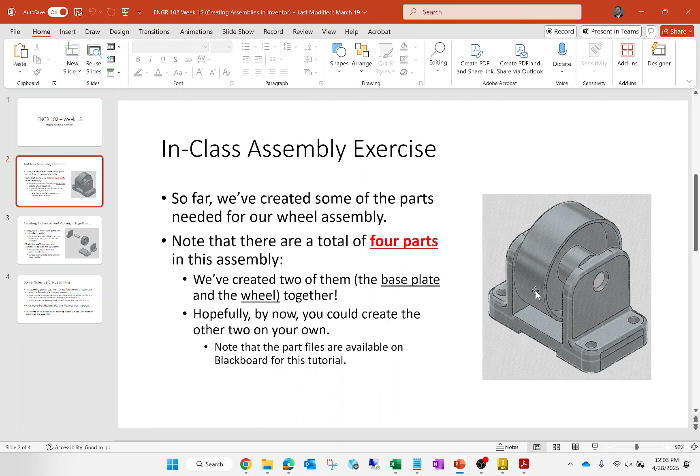All right, so what we're going to do today is, we've created 2 of these parts together, I imagine you could create the other 2 on your own. What we're going to do is assemble them. So the way that works in Inventor is we create what's called an assembly file, and then we create several instances of those assemblies, and then we stitch them together. So we're going to have 4 parts, but we will have 5 instances, because 2 of those parts, the angle bracket, we're going to use 2 instances of.

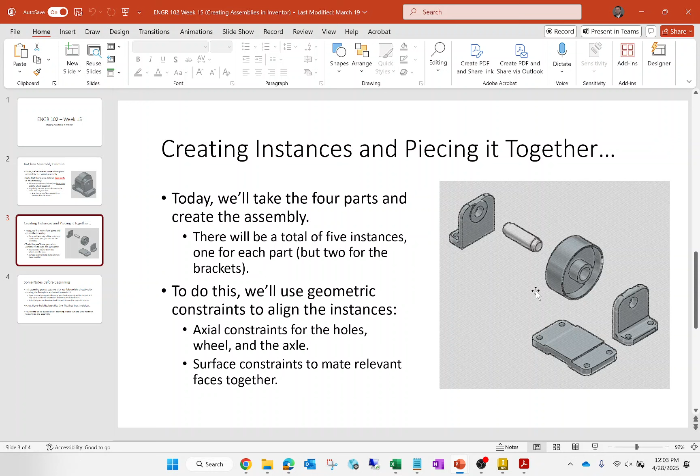Okay, so let me go ahead and open Inventor. I've got Inventor open here. I'm going to create a new assembly, we're not creating a new part, we're creating a new assembly. So that's down here. We're going to create a standard metric assembly, hit create, and then let this do its thing.

So if you look up here, it is slightly different, we have an assembly or an assemble tab, we didn't have that before. Essentially what we're going to be doing is inserting instances of these parts. Now, for the purposes of this assembly, it does not matter, and really assemblies in general in Inventor, it doesn't really matter where you place the instances because we can constrain them later. In fact, I actually think it's kind of a good idea to scatter these things apart.

Okay, so what I'm going to do is, first off, I just realized something. I need to replace my parts here because I think I changed those in the last lecture. Yes, I did. So let me copy these.

Delete these, and then paste them, so I have fresh parts I'm working off of. Yep, I need to do that.

Okay, so I'm going to place. What we do is we place an instance. We click the little place component option right here. We navigate to wherever this is. I put these on the desktop, so if you go to the desktop, I have a folder called Starting Files.

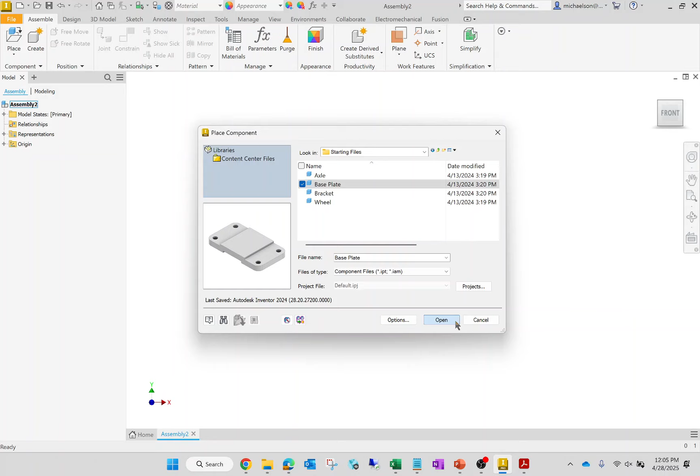What I'm going to do is start by placing an instance of the base plate. So when I hit open, Inventor's like, okay, where do you want to put it? I can put it wherever, so I'm just going to click right here. And when I click, I've placed the instance.

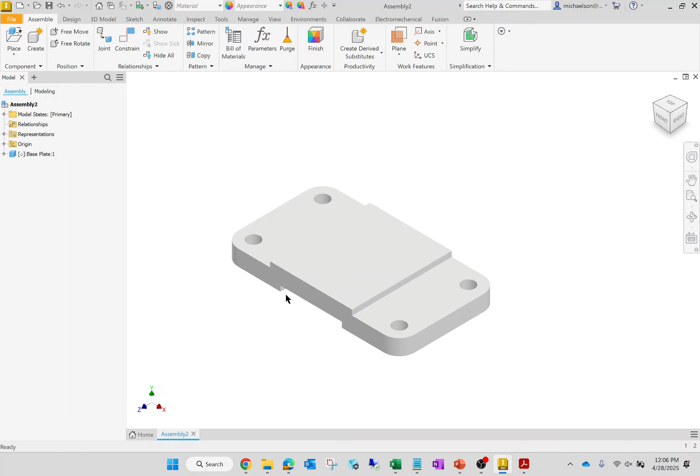Now, if I keep clicking, what I'll do is place more and more instances of the same part. I don't want to do that, so all I'm going to do is hit click and then hit the escape button. Okay, so hit click and hit escape. And I actually think it's a good idea to zoom out a little bit. I want to give myself a little bit of room, because I'm now going to start placing instances of other parts.

Okay, so let's place an instance of, let's say, the wheel. That should also be familiar, and I'm going to stick that all the way over here. Again, there's no magic as to where you put these things, because we're going to constrain them later. So I'm going to put one right there. I'm going to place an instance of the axle. Stick that, I don't know, right there.

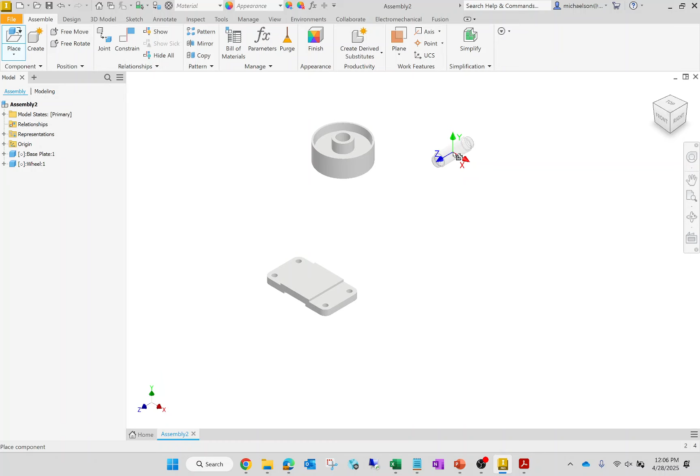And then for the bracket, what I'm going to do is place one instance, and then click again to place another instance, and then hit escape. So in other words, I know I'm going to need two instances of that angle bracket, so I'm going to place it twice inside the assembly. So it's the same part file, but I'm using a copy of it. I'm using two copies of it. That's what an instance is.

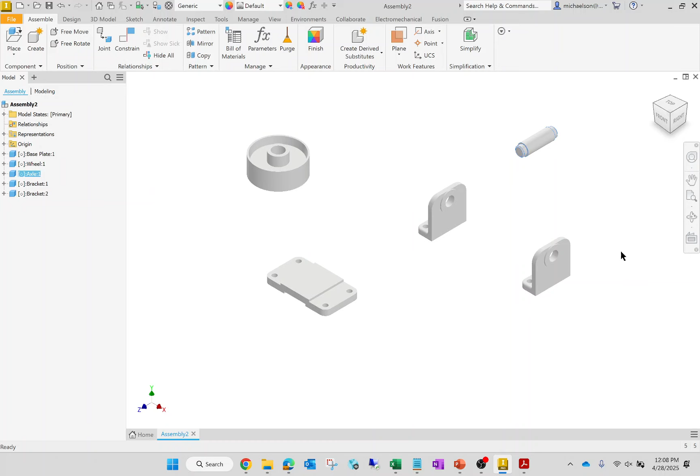Okay, now I'm going to zoom out a little bit to explain how I'm going to do this. I want to get this to where the parts are sort of like over there. That's probably good right there.

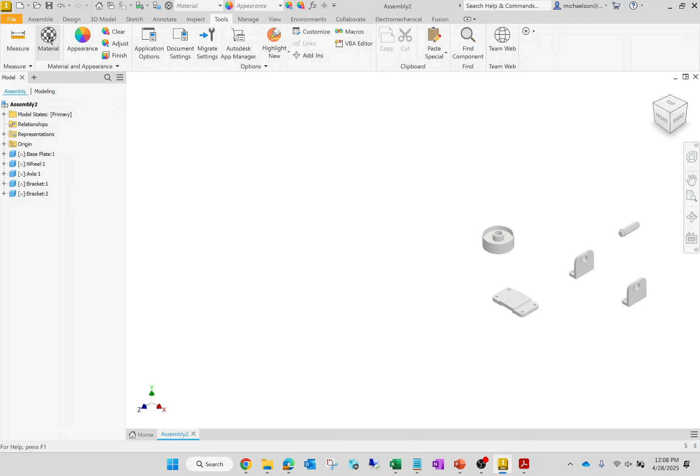Okay, so I'm going to go to Tools and go to the Material tab. So this is the Material Browser. We've used this before because we used it on our stress analysis assignment. For this assembly, everything is made out of cast iron except the axle. The axle is made out of alloy steel.

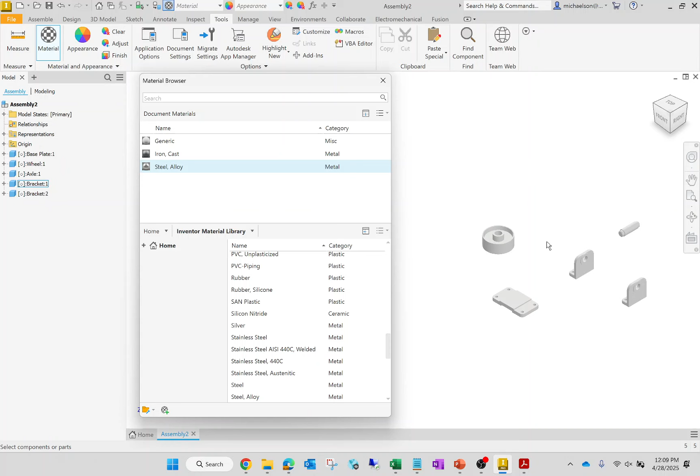So what I'm going to do is load cast iron. I go into Iron, and I click the little up button on cast iron, and then I go to alloy steel, and I click the little up button on alloy steel. So essentially I'm loading into my assembly the two materials that I'm going to need. But I'm not going to close the material browser, I want to leave that open. So you can see I've got the material browser on the left, and I've got my instances on the right. And all I'm going to do is click a material, click an instance. Or sorry, other way around. So click that, click a material.

Click the axle, click the alloy. Now what happens with the brackets, if you click the bracket and then click the material, it actually assigns the material to both instances. Because what we're actually doing is assigning material characteristics to the parts, not the instances. So when you assign materials to a single instance, you're actually assigning it to the part, so it affects every instance.

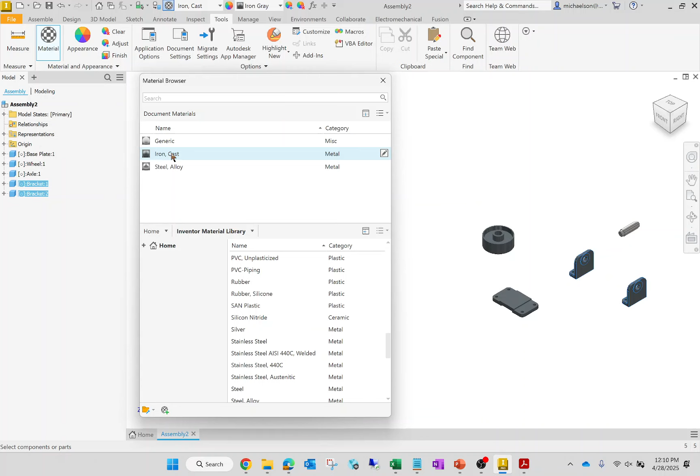Okay, so we'll hit close, hit our little home button. And so now, if you do this right, what you should find is that every part in the assembly has a dull black hue to it, other than the axle, which should be kind of shiny.

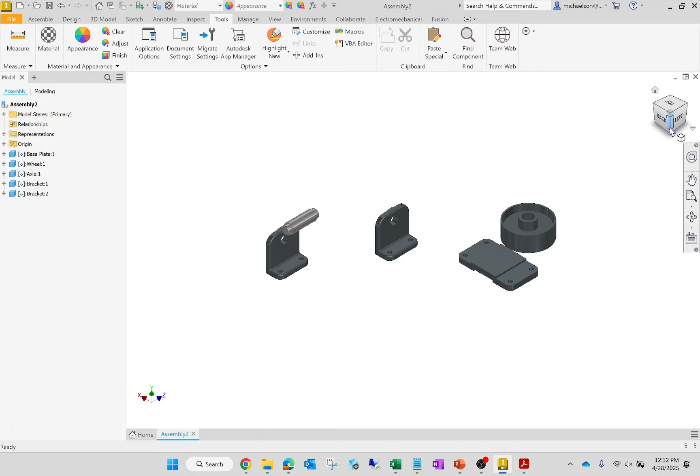Because there's nothing that Inventor is doing to lock positions. What we're going to need to do now is to lock positions, okay? Now, I want everybody to be clear, we are going to have to do a lot of rotating of the screen, looking at the assembly this way and that way, rotating it around. So make sure you're comfortable using that cube in the top right, because we are going to use it quite a bit.

Now, the way we're going to do this is we're going to apply what are called assembly constraints. Assembly constraints affect how the geometry of given parts behave against one another. And what we're often doing when we place constraints is using what are called parent-child relationships. In Inventor, that means you start off by placing the first end of your constraint with the child, and then the second end with the parent. So the idea is that if you're moving parts, the child has to respect the movements of the parent, okay?

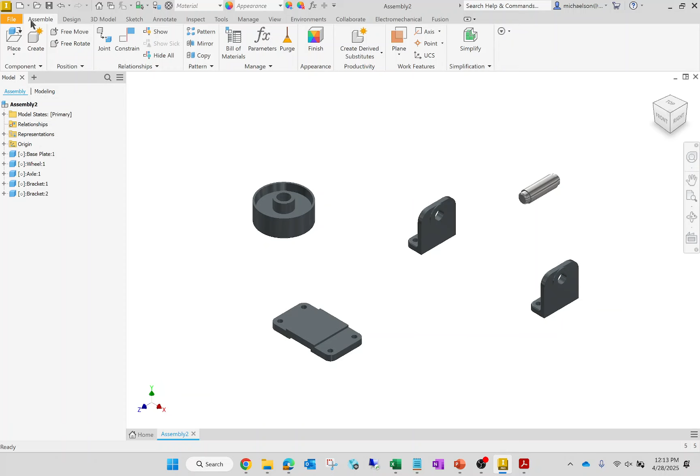So the way we're going to do this is we're going to start off by attaching these angle brackets to the base plates. Everybody watch up here. So I'm going to place a constraint, okay? Now this window pops up. There's a number of different ways you can do this, like mate, angle, tangent, and so on. We're just going to go with the base one.

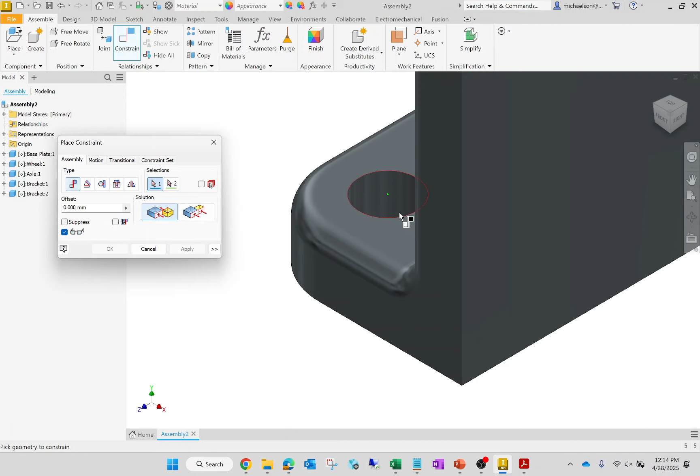And what we have to pick is a child and then a parent. So here's what I'm going to do: for the first, I'm going to use this angle bracket right here to the base plate. So I'm going to zoom in and pick this axis. Now I want to be clear, when you place this constraint, you have to pick the axis, don't pick the circle or a point on the circle — pick the axis, the actual line going through the center of the circle.

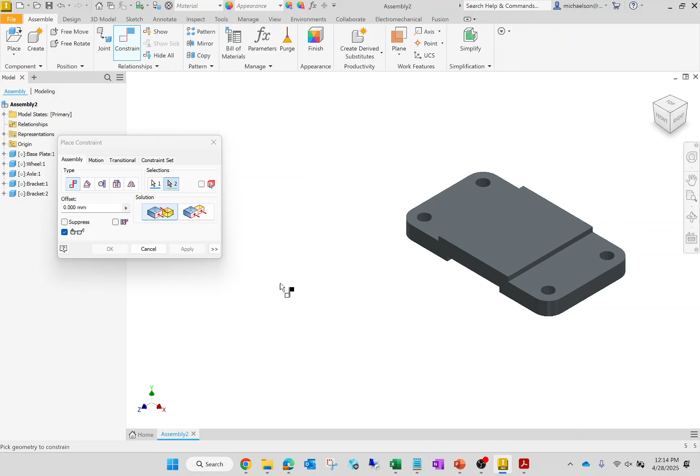And then I'm going to place another constraint right here through the center of this circle. And when you hit OK or apply, I'll hit apply, and then I'm actually going to close this window. Okay, what you can see is that I've constrained this. Now, if I start moving this part, I can move it like crazy, but they are locked such that the central axis of the hole on the bracket is locked to the central axis of the hole on the base plate.

Again, you have to pick the axis, don't pick the circle or the dot. Pick the axis, because that's what you're locking together. Now, it might seem a little redundant, but I've locked the axis of one hole, so I'm going to lock the axes of the other holes too. Kind of redundant for this bracket, but it's not going to be redundant for the next one.

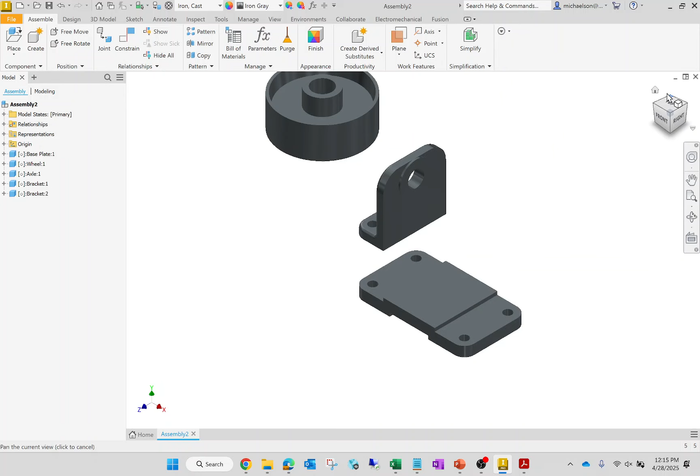Okay, I'm going to rotate around so that I can see both. So I'll constrain that to that and hit apply.

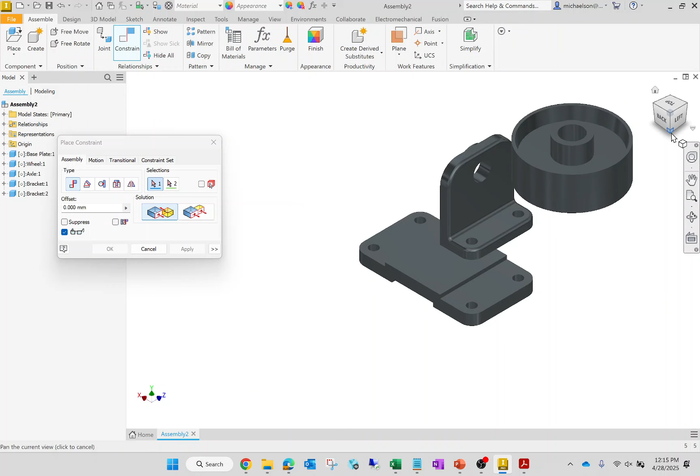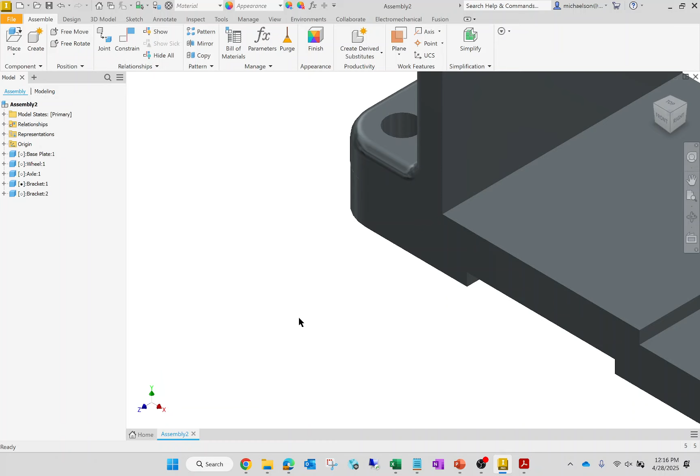Now the problem is, it's fine that I've got the holes aligned, but I want the surfaces to come into contact. So I'll use a surface constraint. Here's my angle bracket, here's the base plate, and I want to constrain this surface to that surface. I'll rotate to see the bottom of this and the top of that, then hit apply, and now those two surfaces are in contact with one another. If I go back to my home view, now they're mated up, which is what I wanted.

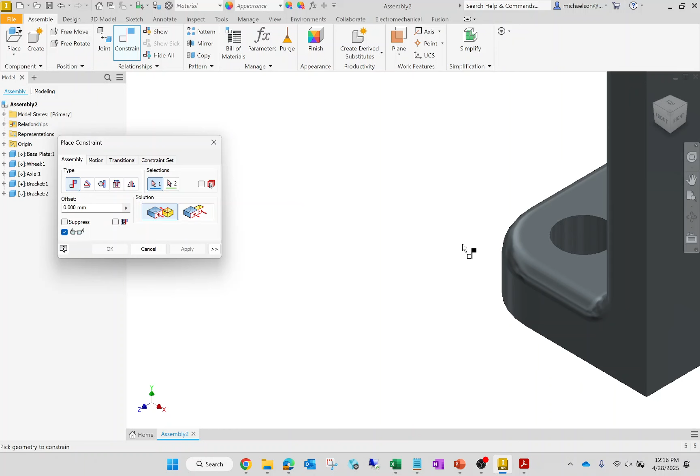Now I'm going to do the same thing with the other angle bracket. The problem is this bracket is turned around the wrong way, and that's where aligning both holes comes into play. So I'll constrain this axis—you've got to be careful to pick the right one—and constrain that against this one. I find it a good idea to drag these away so it's easier to see what's going on.

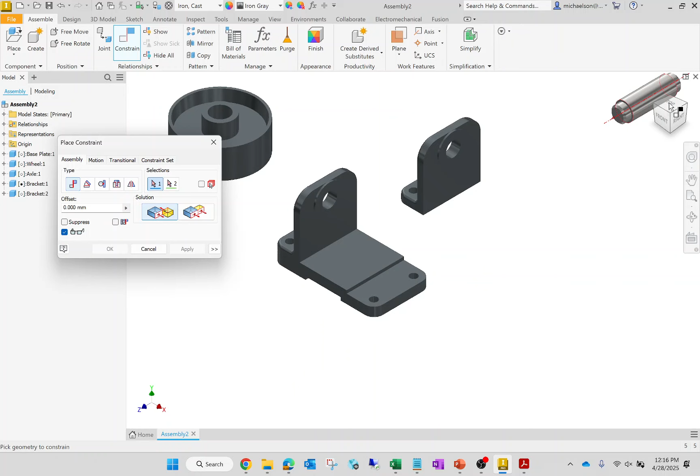Then I'll constrain here. Let me rotate this thing around. I'm going to constrain this hole with this one—again, make sure you click the axis, not the circle, not the dot, click the axis. Hit apply, and now you can see the angle bracket is facing the right way.

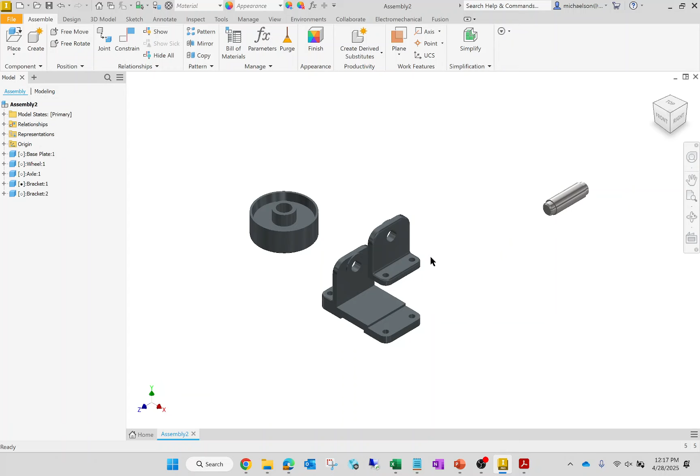The only thing left to do is mate the surfaces, so we'll constrain that surface to that surface. Now it's starting to look a little more like a wheel assembly. Y'all see what I did there?

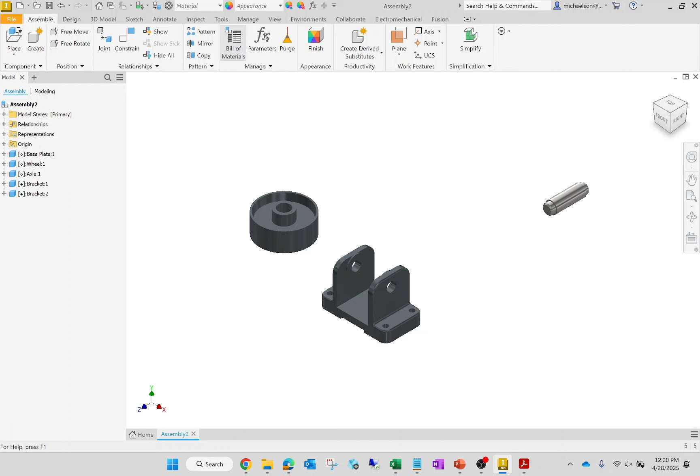The way that works: I'll constrain the central axis of this little axle against the central axis of this hole. If I hit apply, now if I move the axle, no matter where I move it, it has to align with the center of that hole. But now I just need to place it where it needs to go.

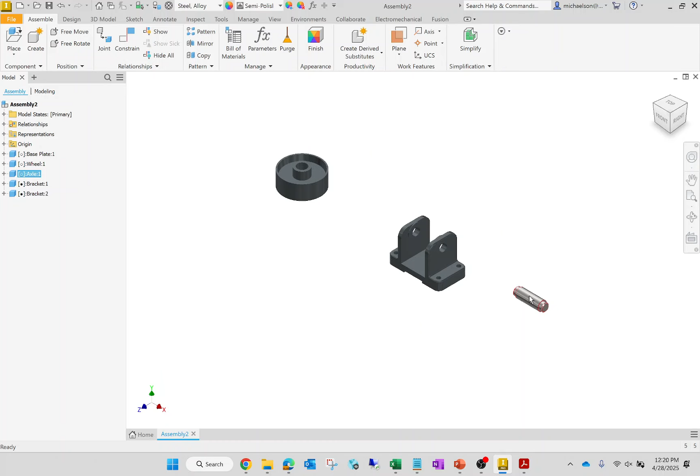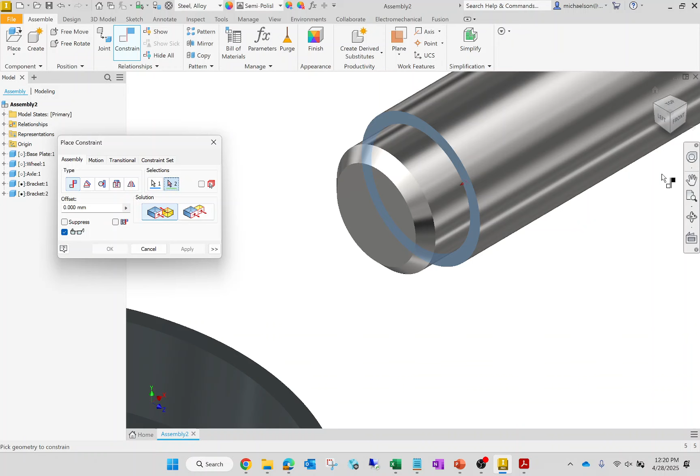Now the way I do that is I'm going to constrain this surface right here—I have it highlighted on the handout. It might be a little difficult to see, but it's that little inner ring, that blue ring, that's supposed to come into contact with the face of the bracket, and what it's supposed to come into contact with is that face right there.

So if you constrain those two and hit apply, for example, looking at a front view, you can see that the axle is right where it's supposed to be.

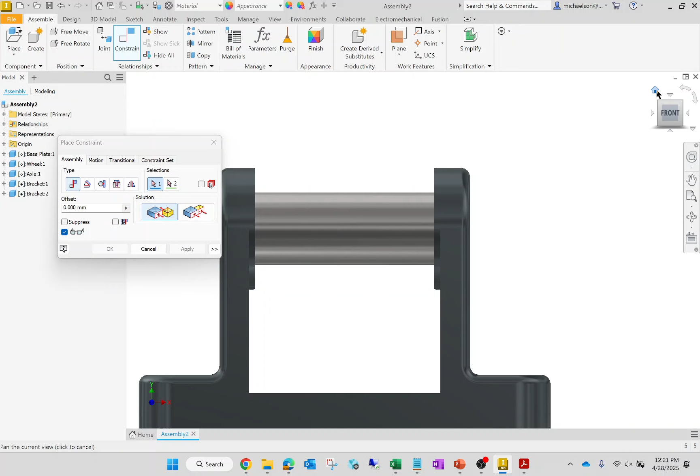Now we'll do the same thing with the wheel. I'll constrain the central axis of this wheel hole to the assembly, which is fine, except now I can move the wheel wherever it needs to go, but I need to know exactly where. So here's the wheel—I can put it wherever I want, but I need to.

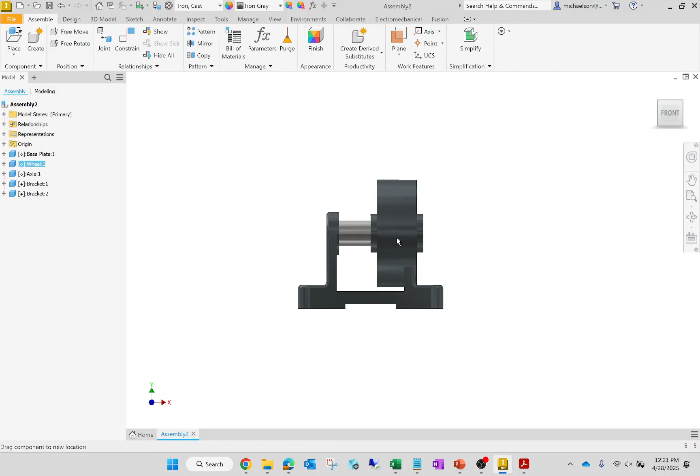It needs to go somewhere here. Okay, and so it is for this final constraint that we're going to learn about what are called offsets.

So the way an offset works: if I have a constraint where part A is to be constrained to the face of part B, and my offset is 0, then they'll be directly in contact. But if I use an offset of, say, 2 inches, Inventor will put part A into contact with part B, and then shove them away by 2 inches.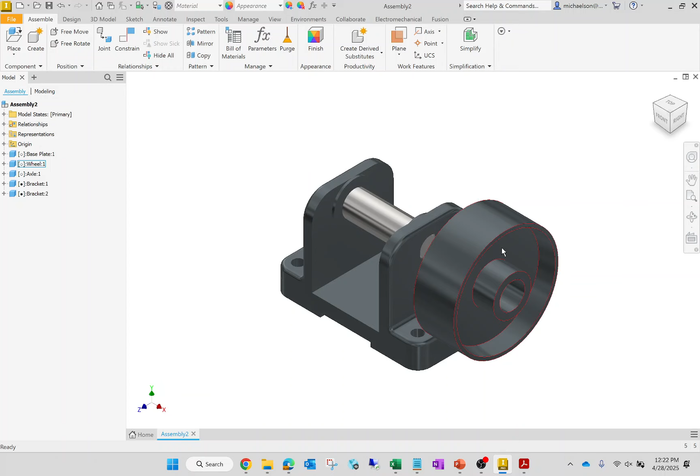So what I'll do is I'll do that with the wheel, because I want that wheel to be perfectly in the middle. So we'll do another constraint. Let's constrain this face of the wheel with that face of the bracket.

And so if I leave everything alone, the wheel is going to be shoved all the way over to the left. I don't want that. See this little box right here where it says offset? So for example, if I make the offset 50, it's going to put those two surfaces into contact, and then shove them away by a distance of 50 millimeters.

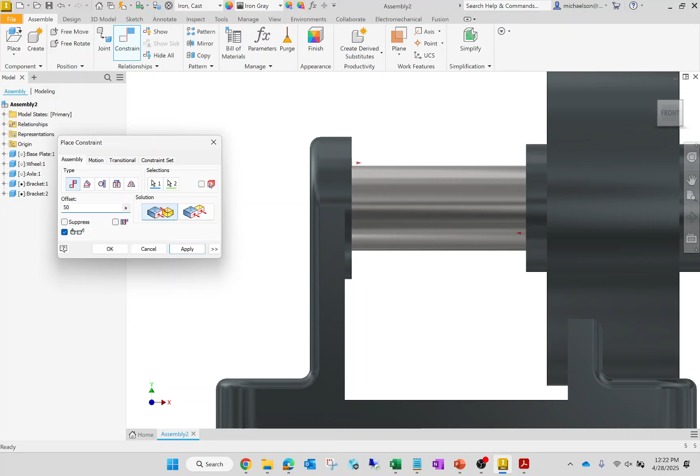Now 50 millimeters is too much, but 5 millimeters, that's right on the money. That 5 millimeters puts that wheel right in the middle. So I hit OK, hit the home button, and by golly gosh gee, there's my assembly, fully set up and ready to go.

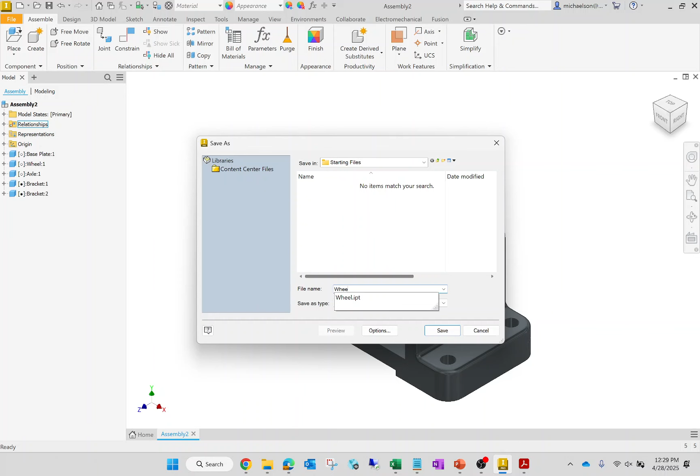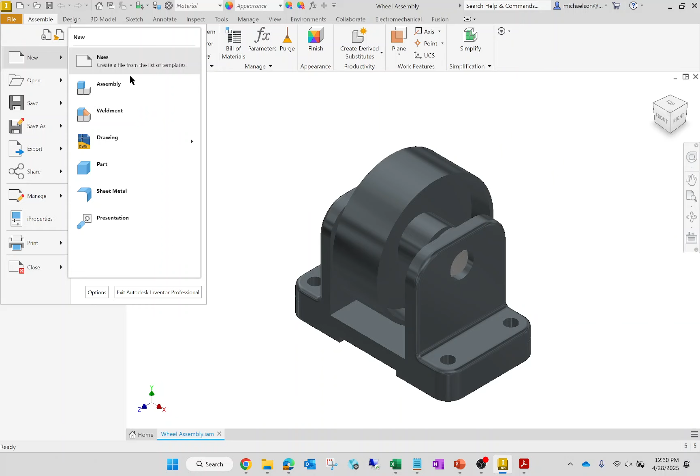So we'll just hit yes to all and okay. Basically Inventor's saying you changed the assembly, but you also changed the part files as well. So if you get that warning, that's okay. Now we're going to create a new drawing. I'm going to save it and call it wheel assembly drawing. Before I move on and start placing views, I'm going to change my properties to get all the formatting stuff taken care of.

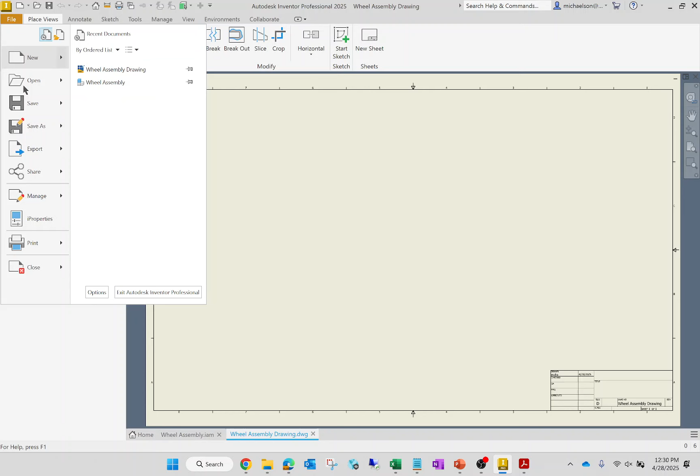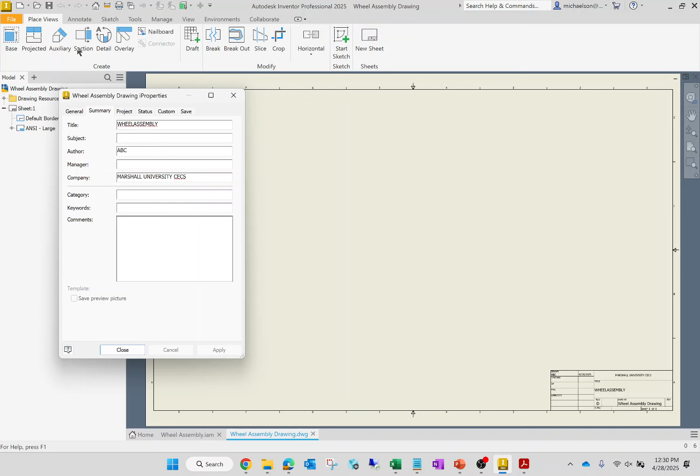We'll make the author ABC. Make the company Marshall University CECS, Project Engineering 102. And then for the status, make this GKM, make this GKM.

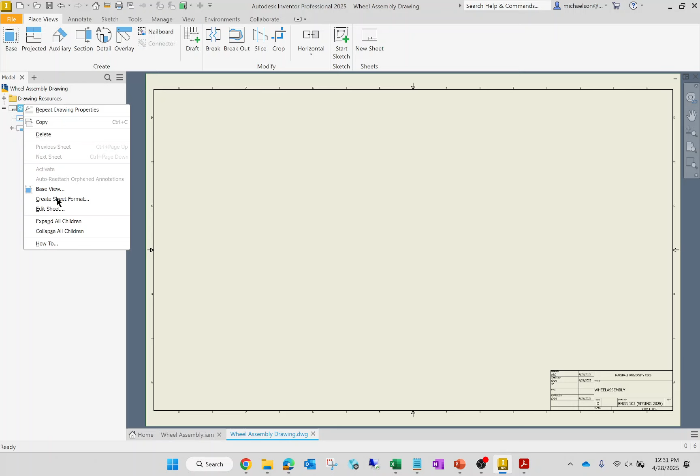Hopefully that part is pretty quick because we've done that before. Basically what I'm doing is affecting that title block there at the bottom. Then I'm going to edit the sheet size to be a sheet size B, and use the smaller title block. I am hoping that everybody knows how to do this, right?

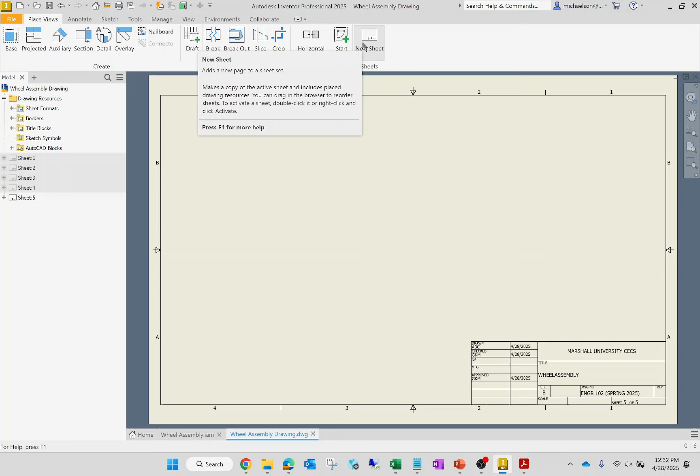Now, I just did this for this problem. How many drawings do you have to do? Five? I don't know about you, but I don't want to have to do this five times. So instead of creating five individual drawings, I can use this single drawing file. If you go up here to where it says new sheet, I could just create new sheets and put all of the drawings in this one file. The benefit is that instead of doing a lot of stuff five times, I only have to do it once. I'll show you what I mean by that.

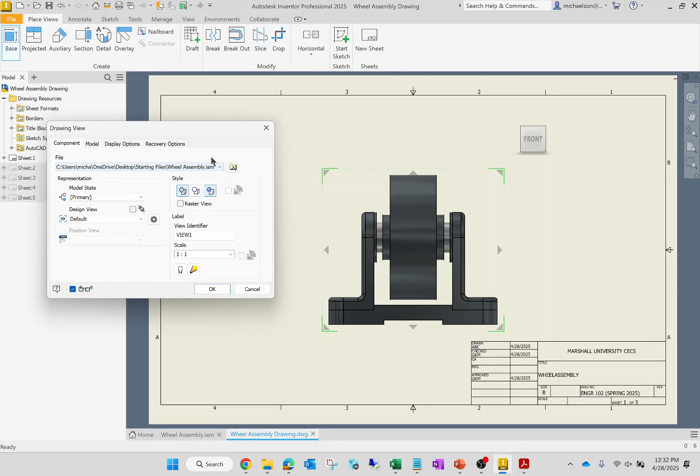Now, what I'm going to do is go into sheet 1, so I'll just double click sheet 1, and I can start placing assembly views. How do I do that? Well, it's the same way I've been doing it. Go to the base, right here where it says assembly. The scale for this assembly, I'm going to use a 1:2 scale.

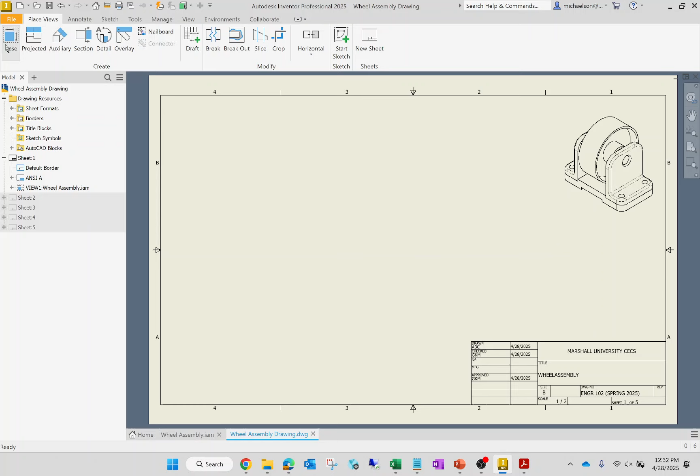Maybe what I'll do is I'll put an ISO view, stick that up here in the corner, hit OK. There's my ISO view. Let's do a front, top, and side. Here's my front. There's my side. There's my top.

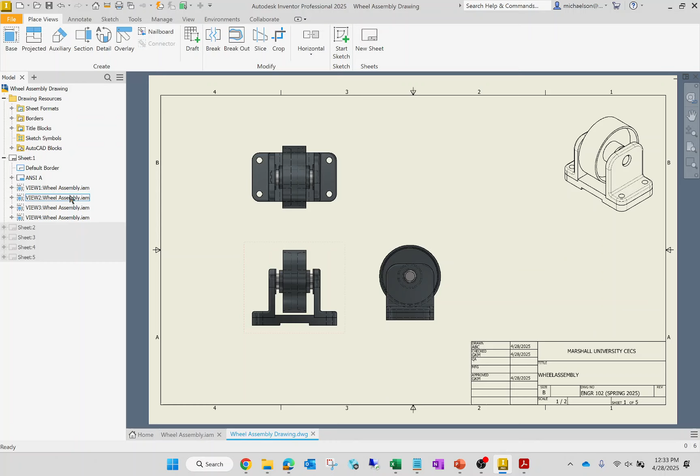Now, I don't know if you noticed, but it's rendered it, given it shading. You can affect that really easily. All you have to do is double click the view on the right or the left. So we'll click that, turn the shading off, hit OK. Double click, turn the shading off, and so the shading is right here. Just turn that off, hit OK. Turn the shade off, hit OK. By golly gosh gee, there's my assembly.

Okay, then what you can do, watch this. Here's my assembly drawing. I can go to sheet 2 and start doing part drawings. How do I do that? I place a view, but look right here, let's pay attention to what's going on. So it's saying place a view, but basically see where it says file, it says place a view of what? Well, I'm placing a view of the assembly.

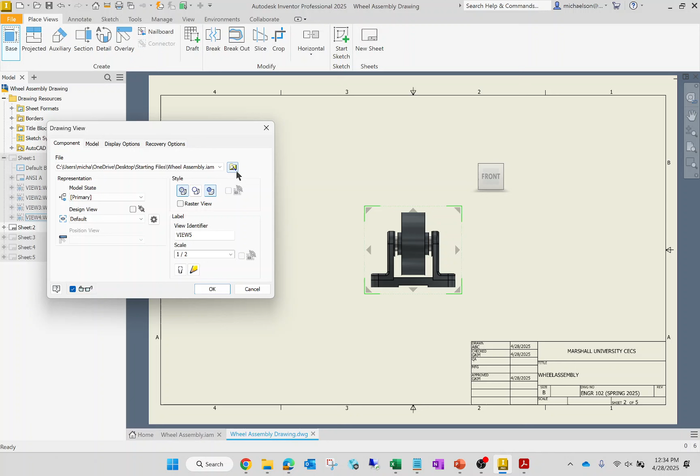If I click this little folder button right here and navigate to where my files are, maybe the MS drive on the X folder or wherever you place them, I'll go to starting files and do like the base plate, maybe at a 1:1 scale. Stick that right there. Boom. So now I can have all of my drawings in one file.

If you have already started doing your part drawings for the vice assembly, no big deal, you don't have to do this. I imagine some of you have already started doing it. That's okay. I don't care if you submit 5 PDFs, 1 page apiece, or a single PDF with 5 pages apiece. That's fine either way. But if you have not yet started doing your part drawings, this is a lot faster, because you can do all the formatting all at once, and plus it numbers the sheets for you.

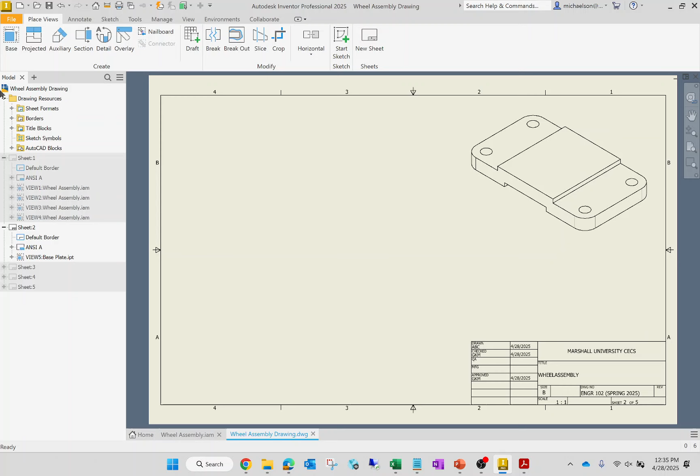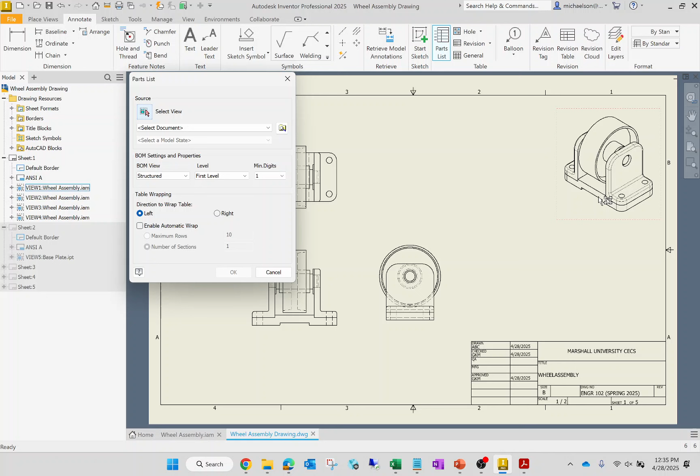Now, the only other thing I want to show you, if we go to sheet 1, I haven't yet shown you how to do a bill of materials. A bill of materials is a list of all the parts that goes into the assembly. The way that I do that, this is an annotation, so I just go into the annotate tab. If you look here, they call it a parts list in Inventor, so I'm going to click parts list. Now, when I create a parts list, it's asking what am I creating a parts list off of. So all I need to do is select one of these assembly views, hit OK.

Hit OK, and you'll notice this little box pops up. I'll just stick it right there. And there's my bill of materials.

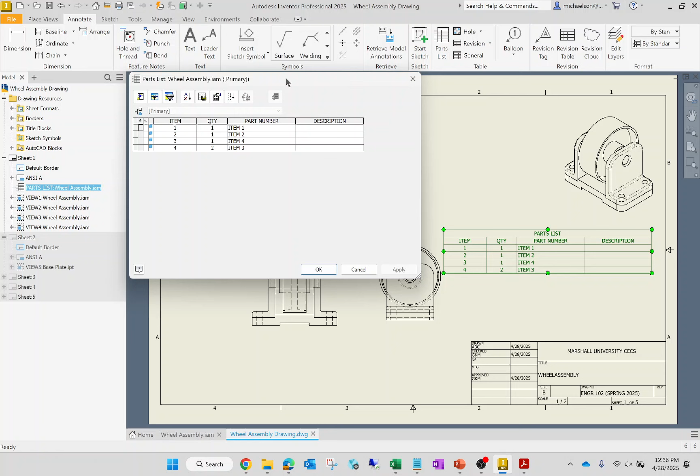So I'm going to right click and go to edit parts list. And so I get this little dialog box right here, showing all the columns and whatnot. I'm going to go right here to the very left where it says column chooser, and when I go to column chooser, I get this thing. So what I'm going to do is, it's showing item, quantity, part number, and description.

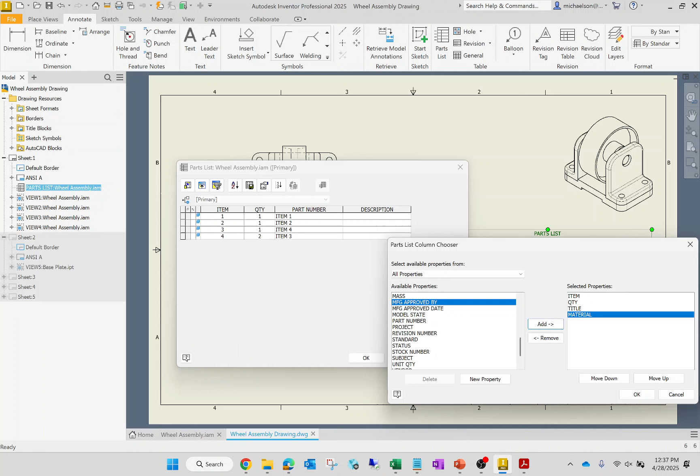I don't want the part number and description. Instead, I want the title and I want the material. So I'm essentially removing those 2 columns and replacing them with the ones that I want. So this bill of materials, I can have it say whatever I want. Hit OK. Now, not only does the parts list get a little smaller, but now it's showing what I want it to show.

The one thing that does sort of slightly irritate me is the fact that the materials are not all caps, but that's okay, that's not a big deal. I'm not going to worry about that for your assignment. All right, does that make sense?

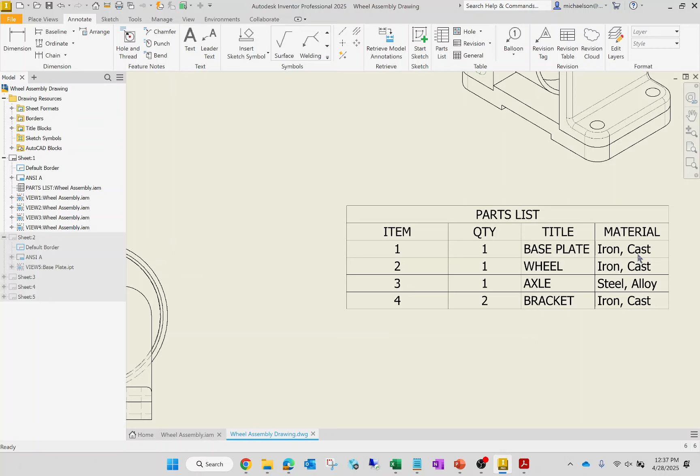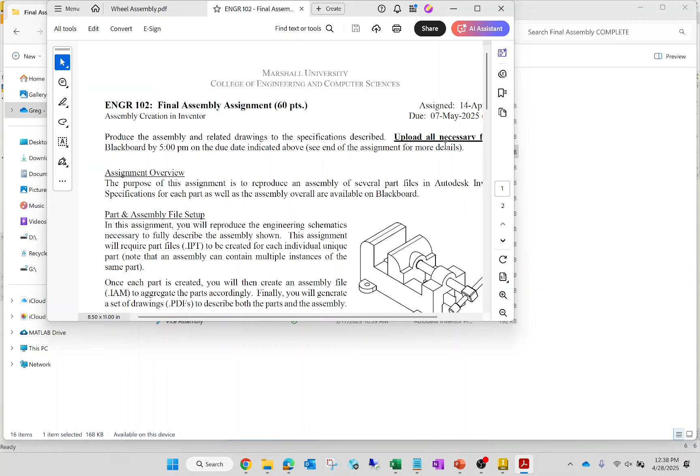So let's just sort of recap something to close out this class and to close out this semester. I want to pull up the final assembly. So this is your final assembly, and these are the final assembly drawings.

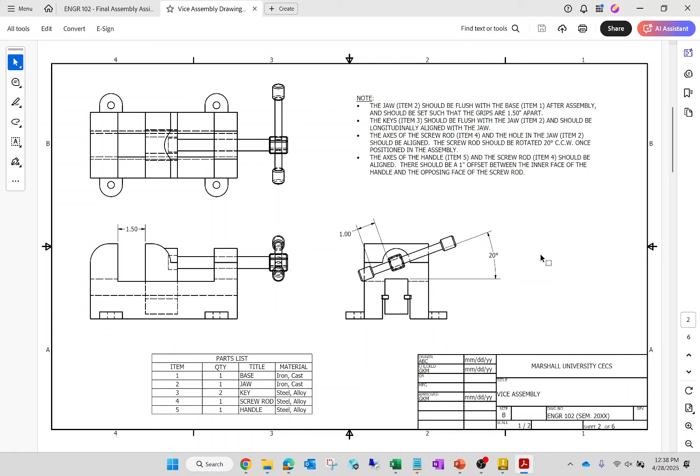I can move this over here. All right, so first off, your task for the final assembly is to recreate every page in the final assembly drawings except page 1. I'm not going to worry about you doing the exploded view, I'm just not really worried about that for the purposes of the class. So I want you to do this, this, this, this, and this, with all the annotations, the text, everything that goes on there. That's what I want for your final assembly.

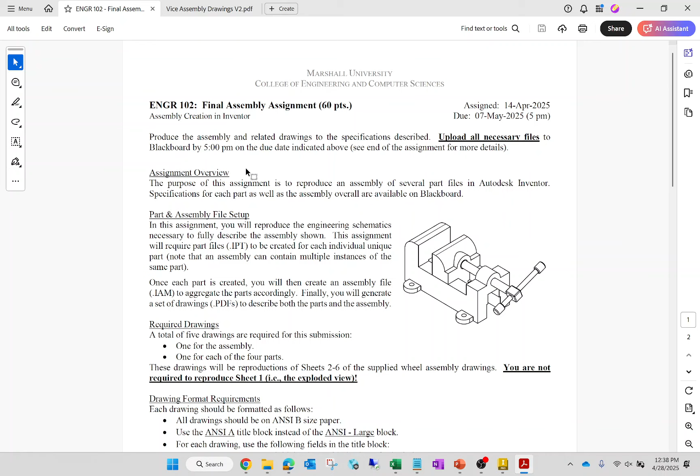As for what you submit, this is the handout that I gave you on the assignment. If you look at the very bottom, I gave you an upload checklist. So this upload checklist, this is what I want you to upload. You're going to upload a Vice assembly file.

You're going to upload 5 part files, and you're going to upload your drawings. If you do the drawings the way that I just showed you today, you're going to have a single PDF with 5 sheets. If you have already started creating drawings, you will probably have multiple sheets, like 5 individual PDFs. I don't care, you can do either one, it doesn't bother me, especially because I know some of you have probably started to chip away at that. That's okay. But that's due when?